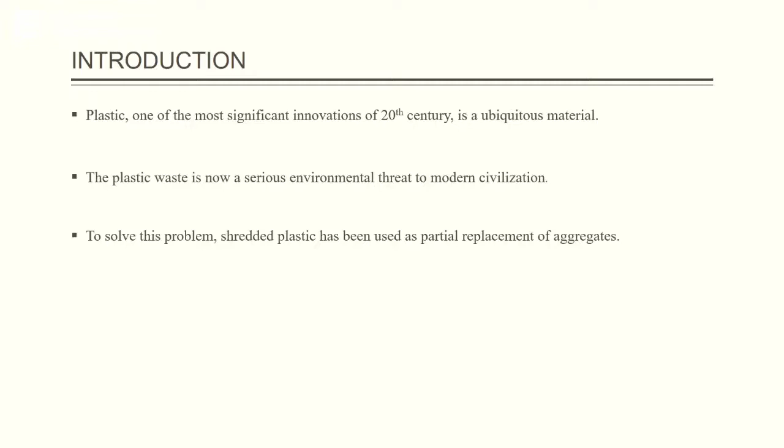To solve this problem, shredded plastic has been used as a partial replacement of aggregates. Some recent studies show it can be used in the construction industry due to properties like inert behavior and resistance to degradation. Also, use of waste plastic can help in reducing plastic waste.

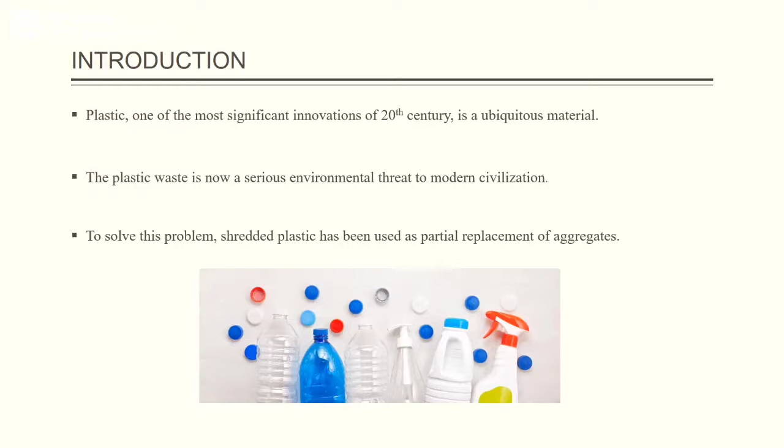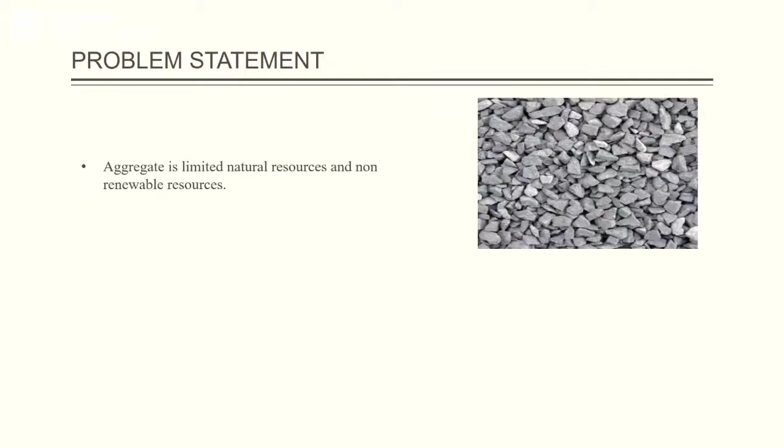Problem statement. Aggregate is a limited, non-renewable natural resource. The availability of conventional fine aggregates, that is river sand, has become scarce, and sand mining affects riverbed characteristics, increasing the cost of concrete.

Plastic waste needs a long time to decompose, so large quantities of plastic cause land, water and air pollution. It is believed that the breakdown of plastic takes more than 1,000 years. Improper plastic waste management leads to several environmental and health hazards.

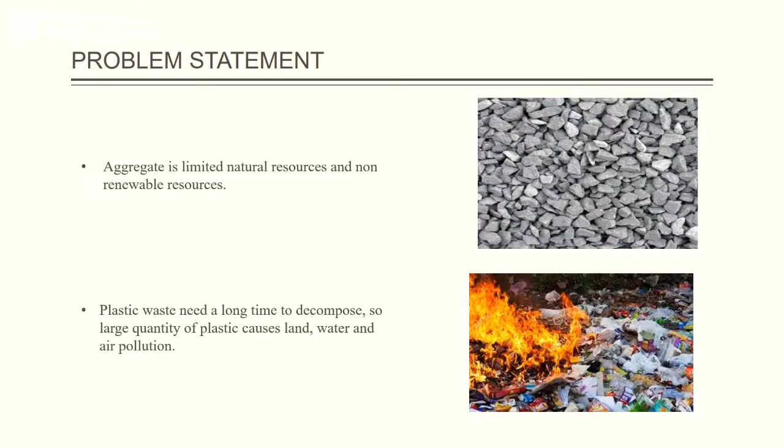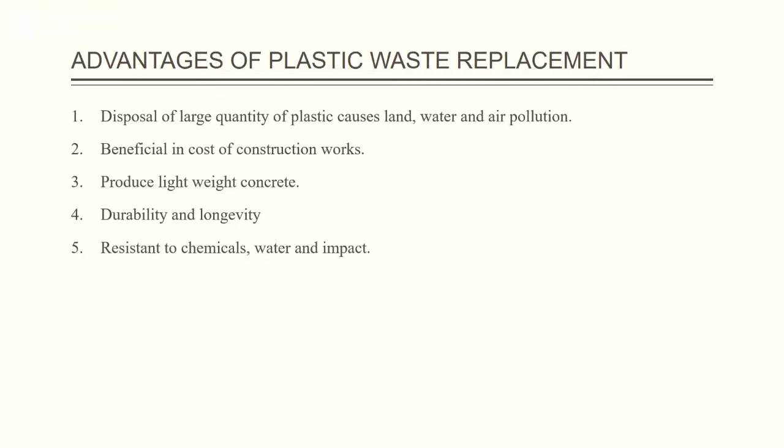Some advantages of plastic waste replacement: it reduces the land, water and air pollution caused by disposal of large quantities of plastic. It is more beneficial in cost of construction works. It produces lightweight concrete with good durability and longevity. It has good resistance to chemicals, water and impact, and excellent thermal and insulation properties.

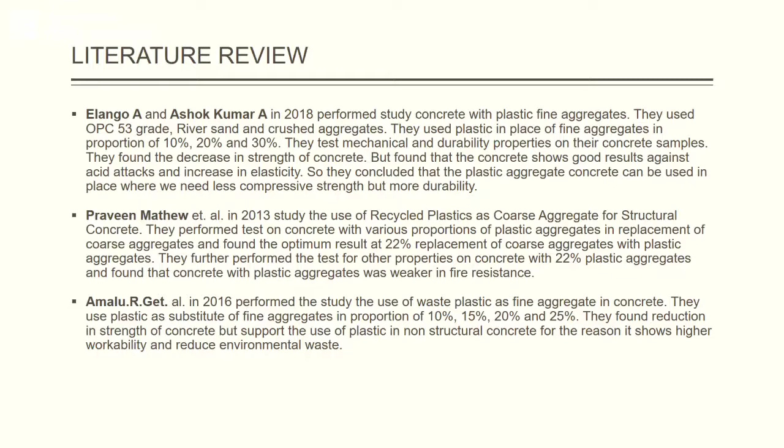Material properties: Cement. Grade 43 ordinary Portland cement was used for casting cubes and cylinders for all concrete mixes. These are the physical properties of the cement.

Aggregates: as per laboratory tests, the various physical properties of fine and coarse aggregates are given in the table. Waste plastic: the waste plastics used for this study are thermoplastic, low-density polyethylene plastics obtained from domestic, commercial and industrial waste sites.

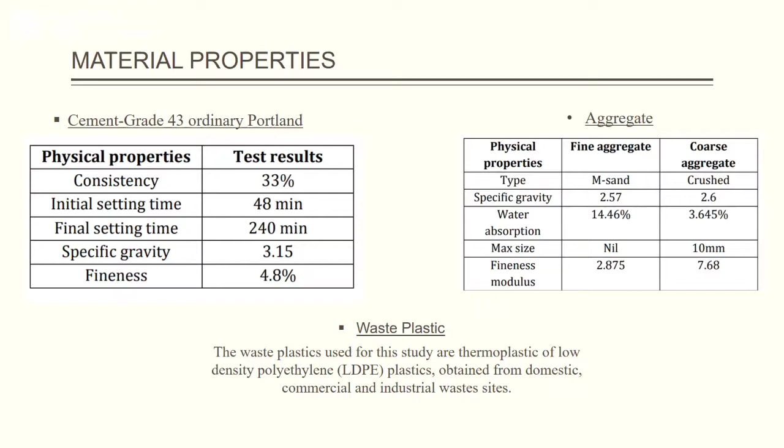Mix design: specimens were cast for different volume percentages of plastic, partially replacing natural aggregates with recycled plastic aggregates (RPAs), at 0%, 5%, 10%, 15% and 20%. Cube specimens of size 150x150x150 mm were cast for different proportions with RPAs and compared with the properties of concrete prepared without RPA.

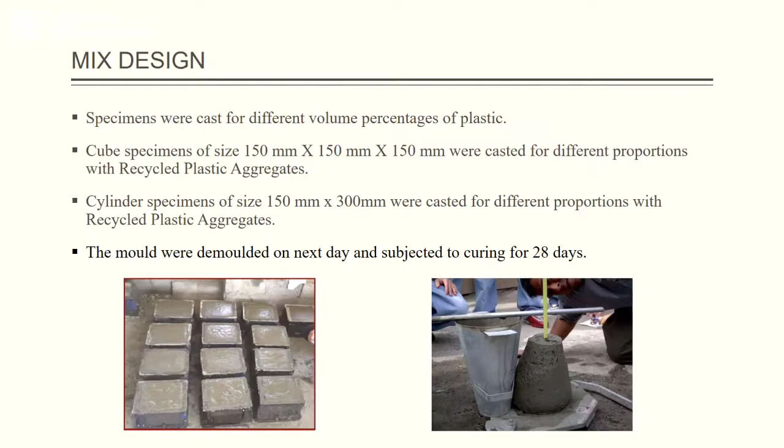Similarly, cylinder specimens of size 150x300 mm were cast for different proportions with RPAs and compared with concrete prepared without RPA. The molds were demolded the next day and subjected to curing for 28 days. The table shows the mix proportions for 1 cubic meter of concrete with various plastic percentages.

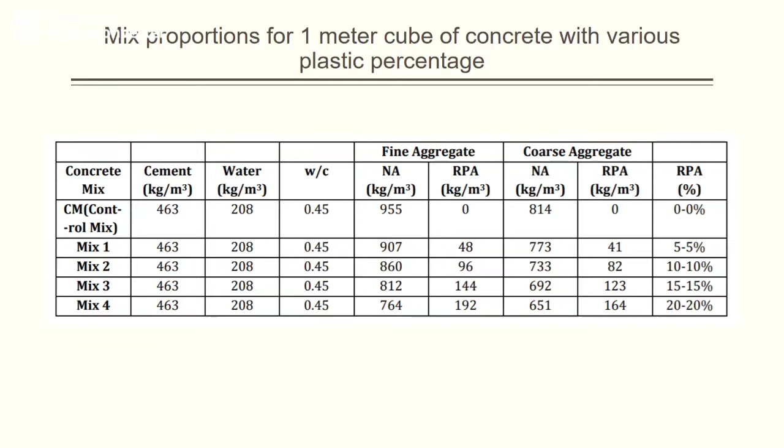Some of the experimental tests and results: slump test. This test measures the consistency of fresh concrete before it sets and is performed to check the workability of freshly made concrete.

When this test was conducted, the slump decreased sharply with increase in waste plastic ratio. The reduced slump values of waste plastic concrete mix are due to slighter fluidity and non-uniformity in shape of the plastic particles.

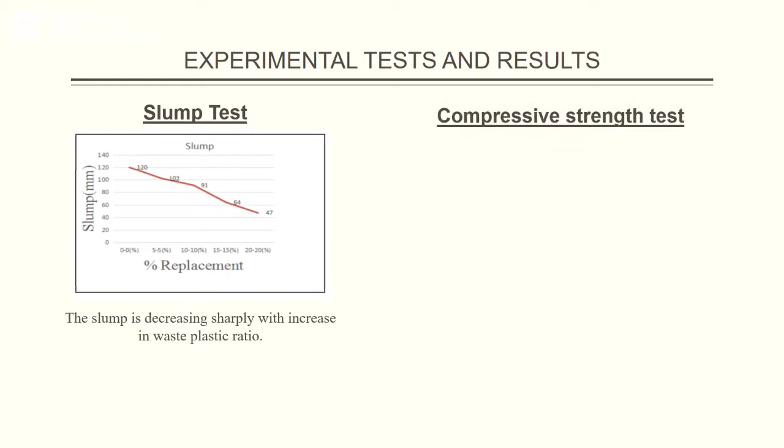Compressive strength test: this is used to determine the compressive force or crush resistance of a material and its ability to recover after a specified compressive force is applied and held over a period of time.

It was observed that there was a decrease in compressive strength by 27.7%, 47.7%, 71.9% and 81% with increasing plastic content for the various percentage replacements respectively.

Split tensile strength test is used to determine the tensile strength of concrete using a cylinder which splits across a vertical diameter. Cylindrical specimens of size 150x300 mm were cast for various curing ages and percentage replacements of fine and coarse aggregates. The tensile strength of the resultant mix is obtained by taking the average of three specimens. The trend is shown in the chart given.

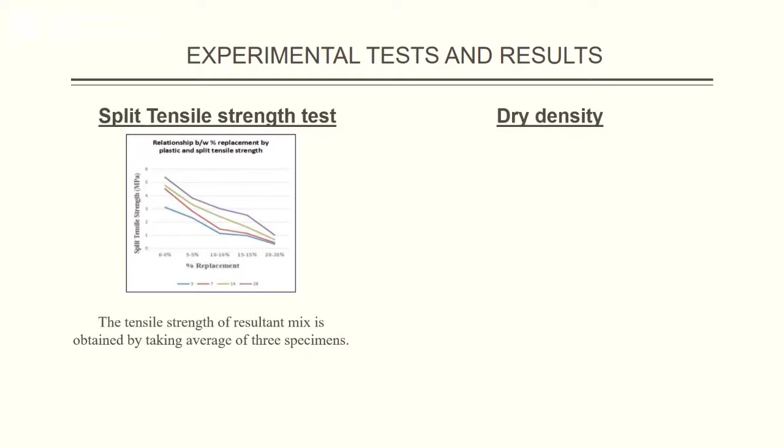Dry density: before performing the compressive strength test, dry density is analyzed first for various curing periods of each specimen replaced by a certain amount of waste plastic. It is found that concrete specimens replaced by waste plastic contained reduced unit weight.

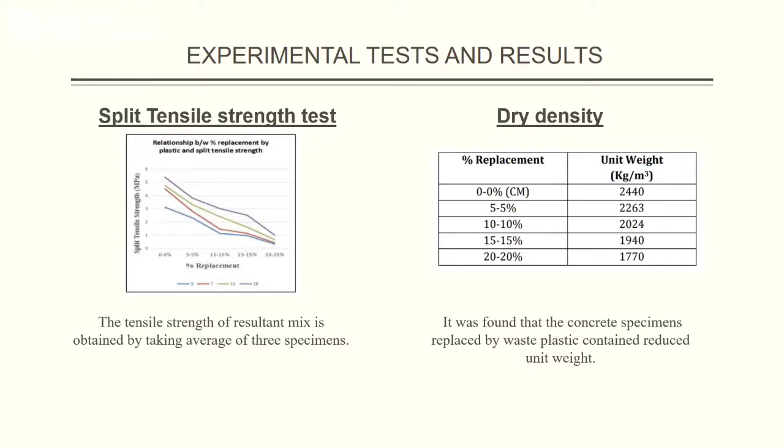Conclusion. The present study observes that both the fresh and hardened state properties tend to decrease as the percentage replacement of plastic in the concrete mix increases. The slump decreases sharply with increase in waste plastic ratio.

These types of mixes can be utilized in situations which require low degree workability. The compressive and split tensile strength of the concrete mix also decreases with increase in waste plastic ratio for all curing ages. With a replacement of 5 to 5%, the achieved strength was almost M30, which would be used

to make pathways, roadways and external walls and slabs. With a replacement of 10 to 10%, the achieved strength was almost M20, which was used as bedding of footings, domestic floors with reduced cost.

With a replacement of 15 to 15%, the achieved strength was likely M10, which could be used as patio slabs, pathways and other nonstructural works.

With lesser density, the 10, 15 and 20% replaced specimens fall under the lightweight concrete category, hence decreasing the dead weight of the structure. The various civil engineering applications where it can be used are namely precast bricks, partition walls, panel walls, canal linings and so forth.

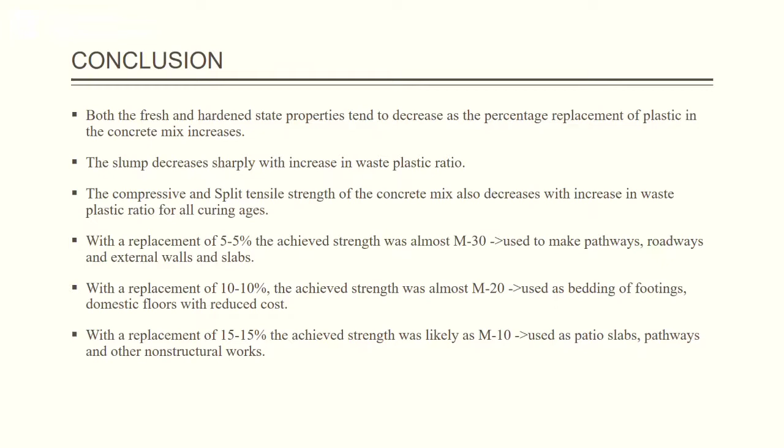Our next study topic is recycled polypropylene formwork technology for construction purposes. These are the contents involved in this presentation.

Introduction. As we know, one of the obstacles with concrete construction in case of horizontal slab is high weight, which limits the span. So recycled polypropylene formwork technology is a void slab technology in order to overcome this obstacle.

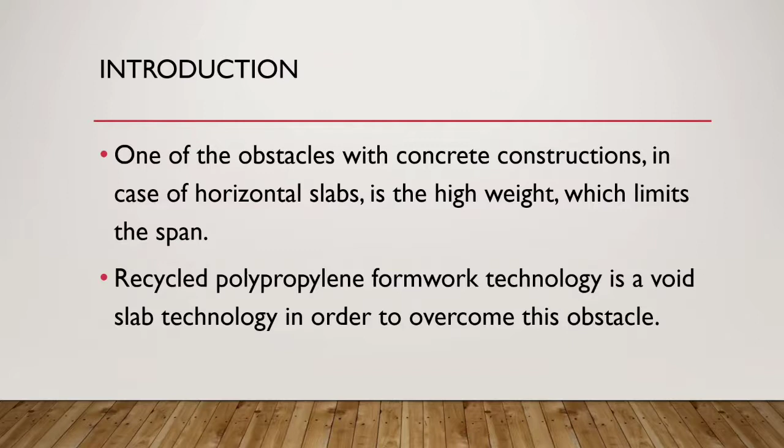So what is recycled polypropylene formwork technology? It's actually a void formwork placed in between the top and bottom reinforcement of slab. It is used to create slabs with large span or that are able to support large loads without beams.

It is designed to create lightened slabs and raft. This technology of hollow slabs with post-tensioned steel reduces the weight of slab and thickness.

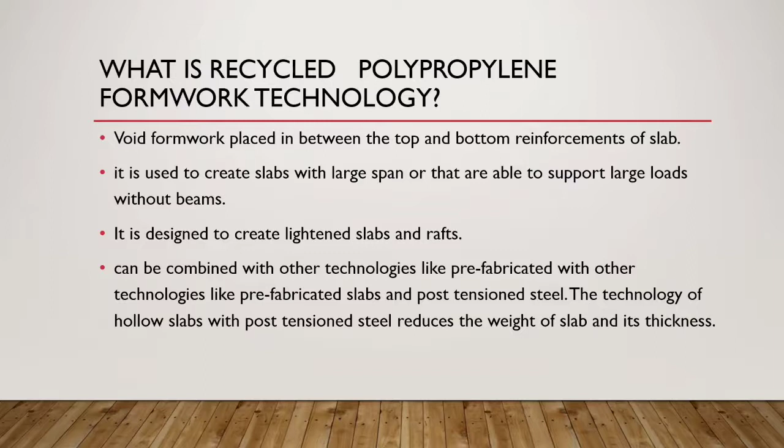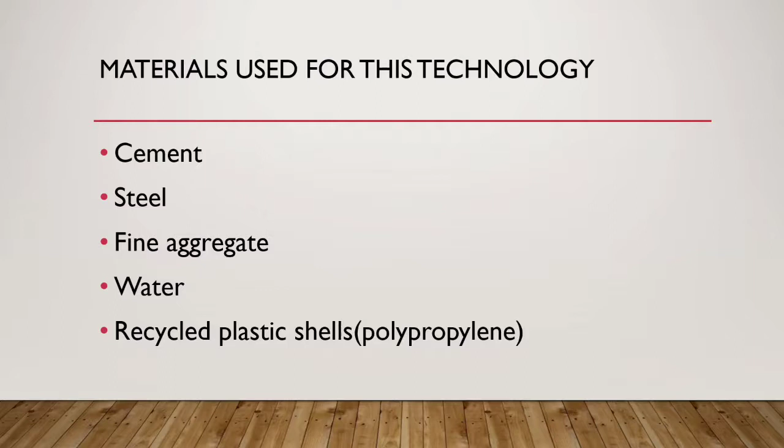These are the materials mainly used for this technology: cement, steel, fine aggregate, water and recycled plastic shells. For the production of formwork units, we are using recycled polypropylene.

So the question is, why only polypropylene? Why can't we go for other polymers? It's because polypropylene is chemically inert in nature and it has very high melting point. It is very resistant to cracks and stress as it is a flexible material.

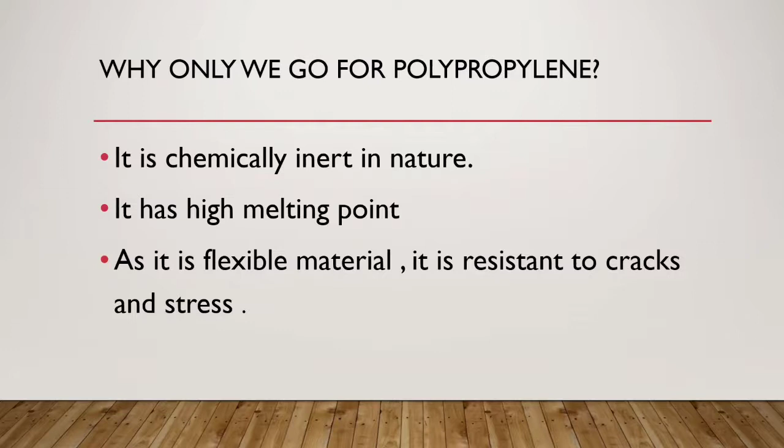Next is about accessories. The first one is spacer joint, also called a connection bridge. It gives perfect bearing capacity to formwork. It is used to connect two units with a graduated scale.

The second one is closing plate. It actually covers the bottom portion of the formwork unit.

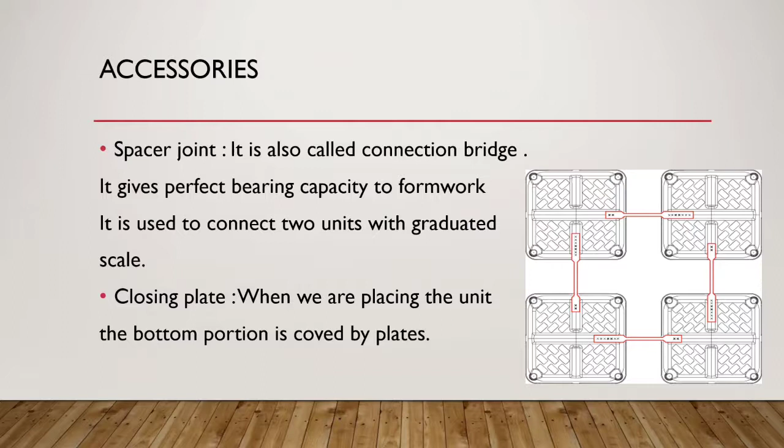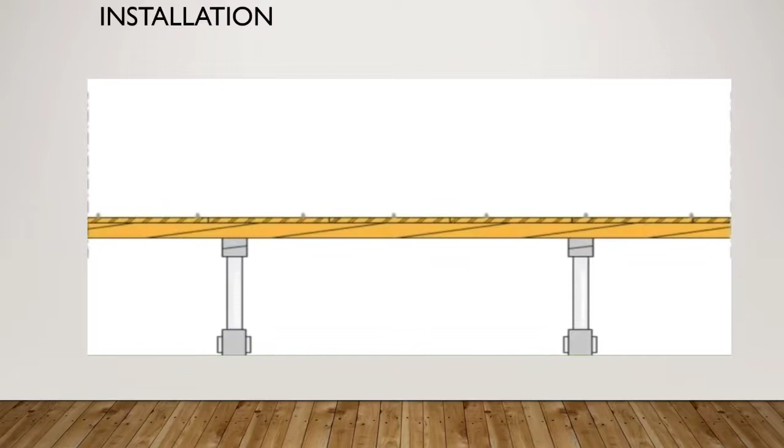So the next question is how we install these polypropylene formwork units within a slab. As we know, the first stage is construction of formwork. The second stage is placing the lower reinforcement structure above that formwork.

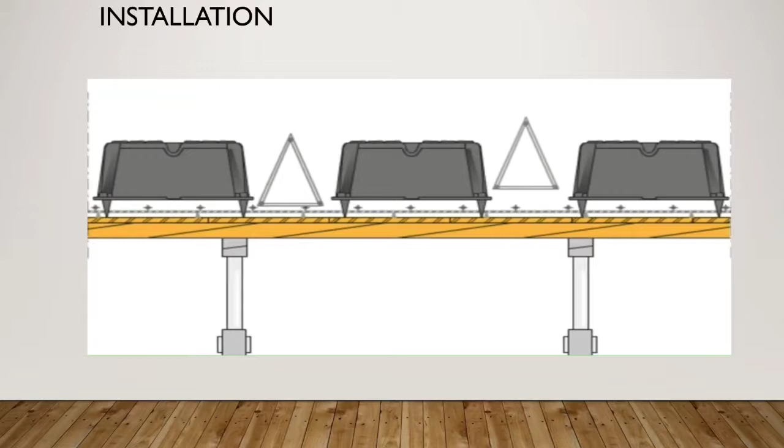Above that lower reinforcement structure, we are placing the polypropylene formwork units. In between the formwork units, we are placing a triangular reinforcement system. This triangular reinforcement system acts as beams.

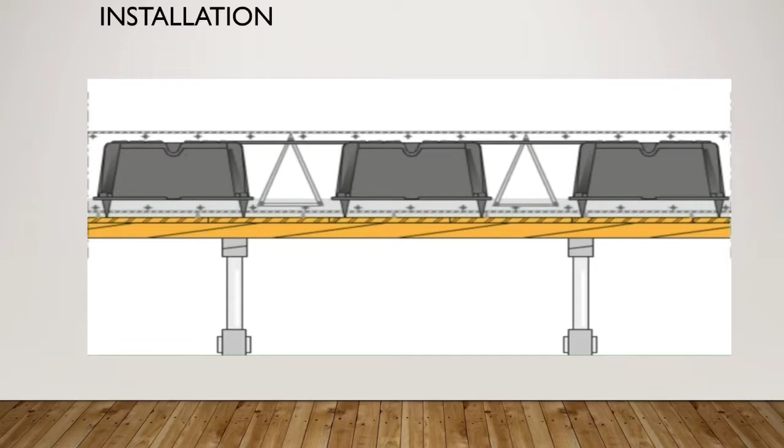Above that, we are providing upper reinforcement system and pouring of concrete is being done. After attaining enough strength, these formworks are removed from the slab.

Next we are going to discuss load carrying capacity. Tests have shown that for a bubble deck slab with the same load carrying capacity, only 50% of the concrete required for a solid slab can be used.

On the other hand, we can say that by using the same amount of concrete, this kind of hollow slab will give twice the amount of carrying capacity compared to a solid slab.

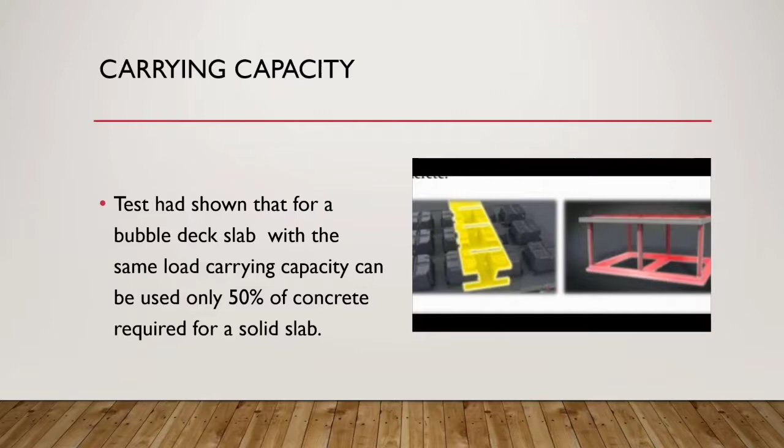Next is about the advantages of this technology. It has led to reduce the dead weight up to 50%, which allows creating a smaller foundation size. Reducing material consumption made it possible to make construction time faster.

1 kilogram of recycled plastic replaces 100 kilogram of concrete, so the overall cost reduces. The triangular reinforcement is provided for the purpose of working as the beam, as mentioned earlier.

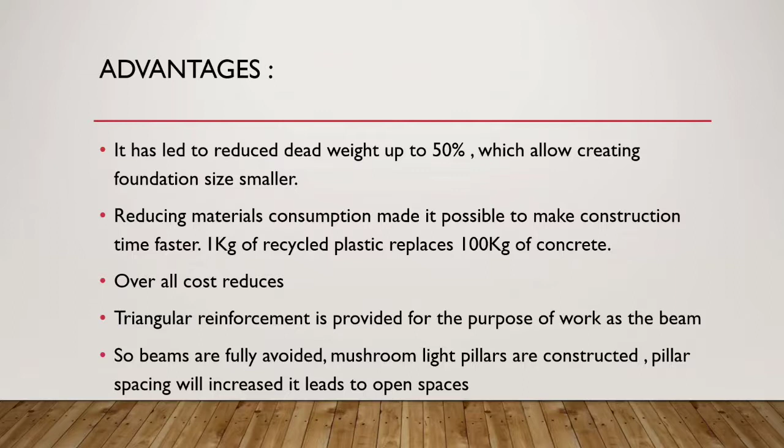The next thing is the structure is able to bidirectionally transmit the load. Usually the load transmits to slabs, from slab to beams, from beam to pillars, pillars to foundation. In this case, loads are directly transmitted to pillars and from there to the foundation.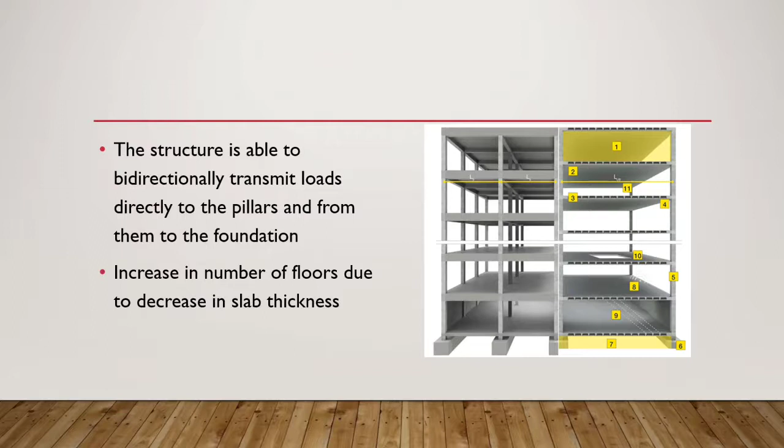It has high fire resistance, so the chances of spreading the fire to the higher stories are very less, and it has high sound insulation as we are using polypropylene formwork, and it is very resistant to earthquake also.

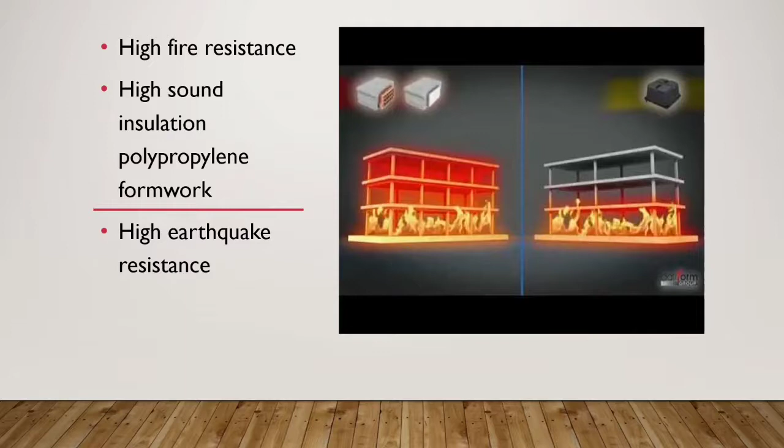The next slide is about the application of recycled polypropylene technology. It can be used in public buildings, hospitals, industries, etc., and using raft foundation and two-way slabs also.

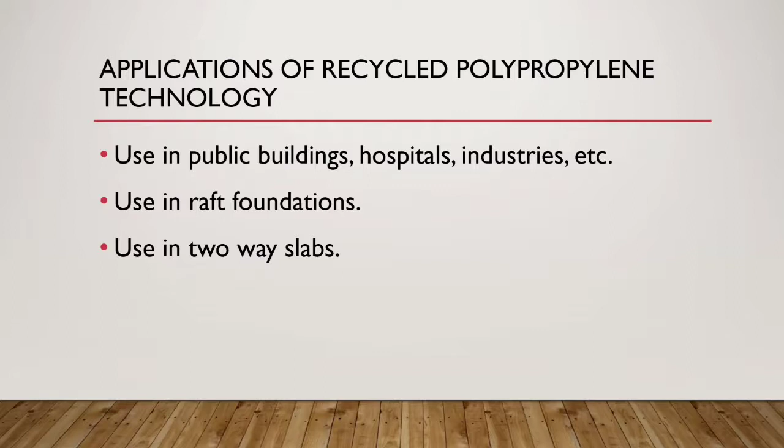As a conclusion, we can say that it is eco-friendly, economic and sustainable technology. By reducing the consumption of concrete and steel, the structure will become more economic. And as we know, by reducing the consumption of concrete, we can reduce the production of cement, and it will lead to reduce the global carbon dioxide emissions. Less use of iron in slabs, pillars, and foundation up to a total of 15%. The structure will be anti-seismic and it's a very useful technology.

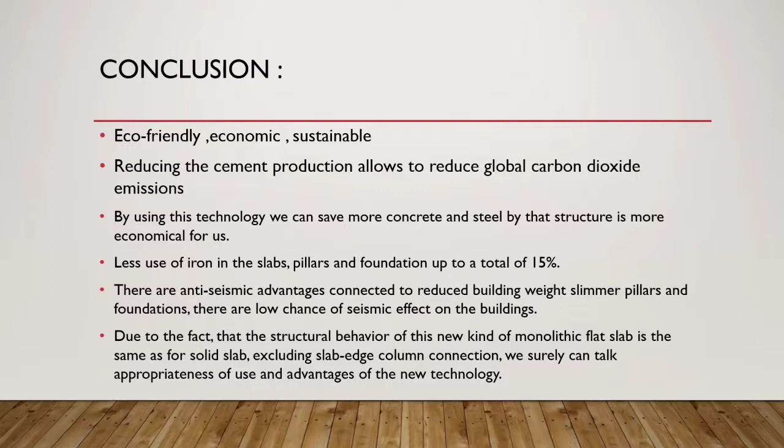Finally, these are the resources that I am getting information from, and thank you.

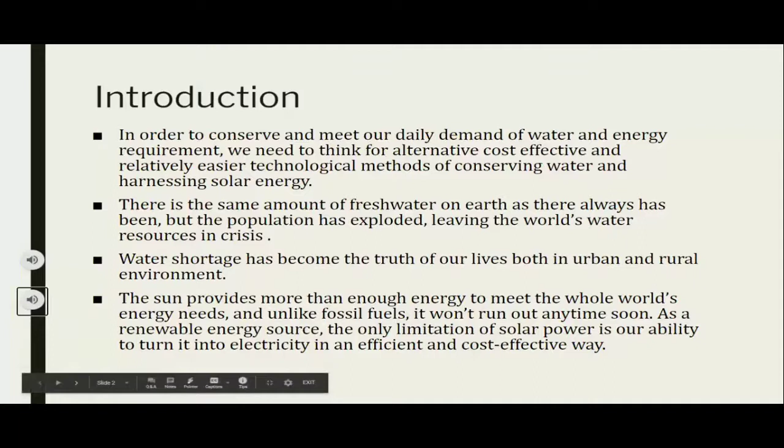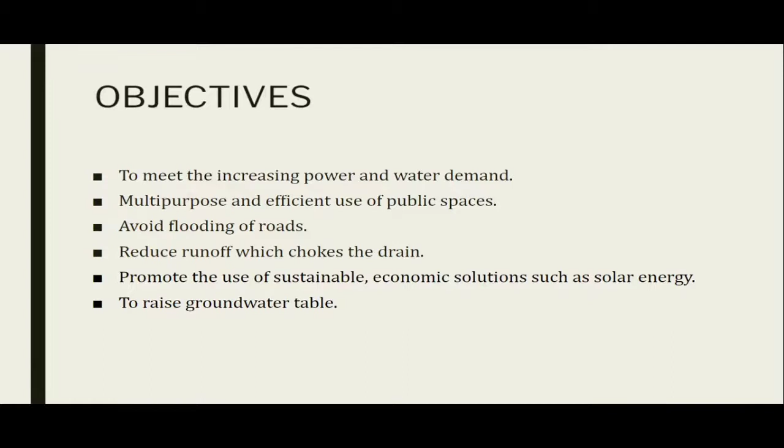Now, coming to the objectives of our project: to meet the increasing power and water demand, multi-purpose and efficient use of public spaces, and promote the use of sustainable economic solutions such as solar energy to raise the groundwater table.

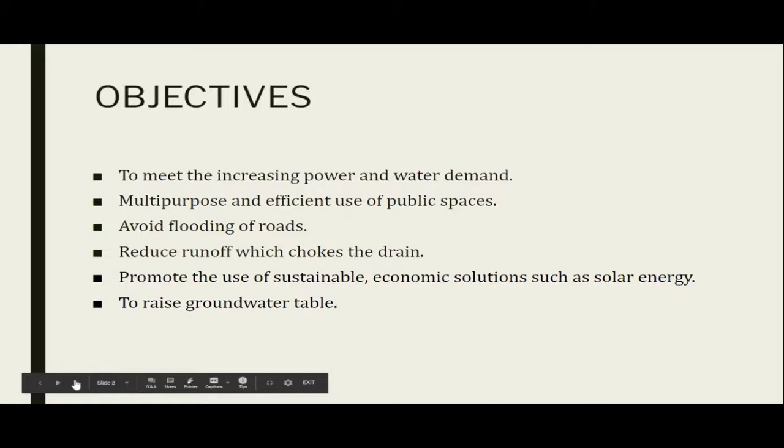We all know the situation of Kerala during monsoon. Drains are overflowing, roads are getting flooded, people lose their belongings and their lives. We need to bring an end to this. That's one of our major objectives.

At 12 feet high and 300 square feet coverage area, it is also a very large shading device under which almost 20 people can sit or two cars can be parked.

It collects rainwater, filters the water using a physical filter, then it reaches the storage tank through pipes. A part of the water is used to operate a UV water filter for drinking purposes. Another part of this water is used to run a low flush toilet placed adjacent to the parking.

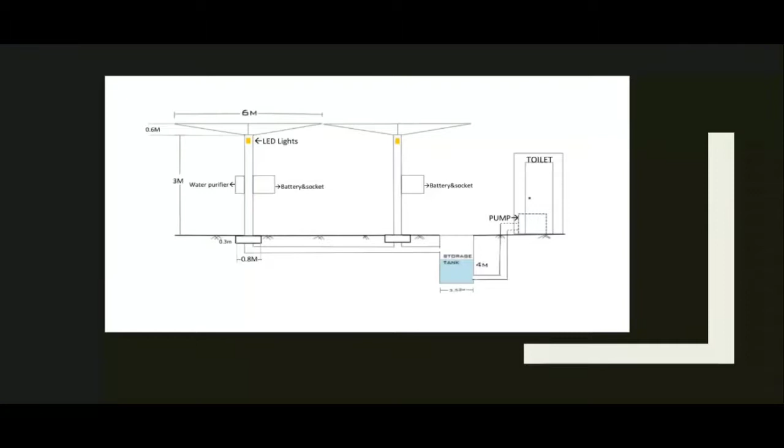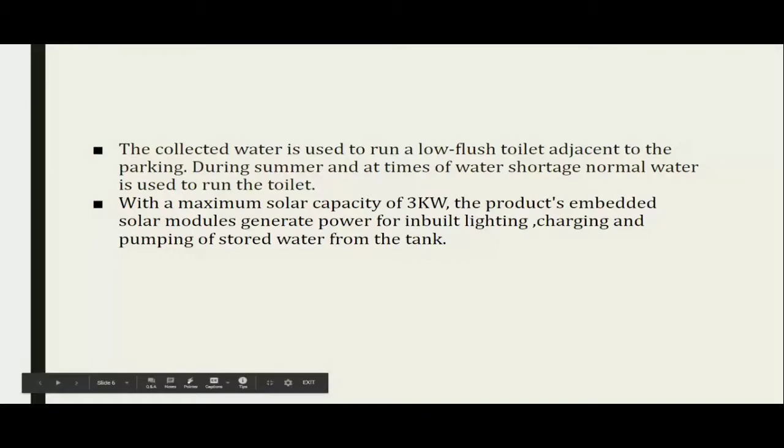The first one is a flexible inverted canopy. It is segmented, that is, it is divided into 8 triangles. The area of each canopy is 6 meter into 6 meter. The material of the canopy can be anything that we find locally. It should be thin, impervious to water, and flexible.

Then the next component is a steel unibody which is supported on the ground and it holds our canopy. The height of this steel unibody is 12 feet and it has a diameter of 0.32 meter. It is through the inside of this steel body that water flows and moves into the underground tank.

The next component is solar cell to provide energy. We are using 6 panels, that is we are placing 6 of these panels on each of the segments, so 2 segments will be left void. The type of panel we are using is polycrystalline and the watt of each panel is 250 watt peak.

So overall from one unit we get an output of 1.5 kilowatt peak. From 2 units we get an output of 3 kilowatt peak. This energy is stored in an energy storing device having 200 ampere hour and 12 volt specification.

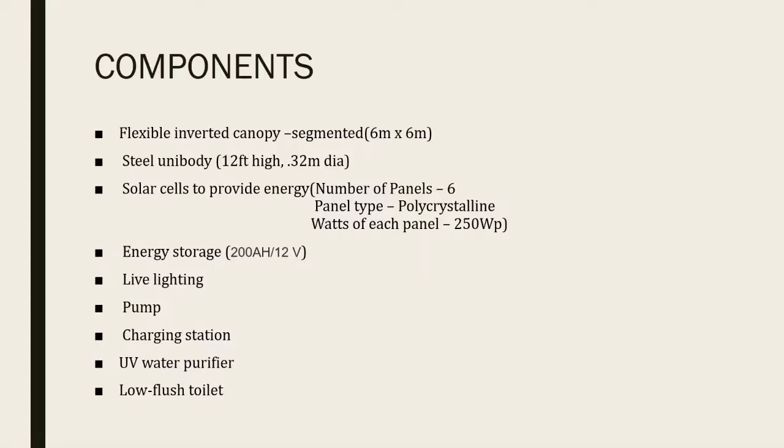Let us discuss how we have calculated the annual rainfall harvesting potential. In order to do this calculation, we have assumed that we are designing the structure for a parking space in Trivandrum. So we have used the annual average rainfall of Trivandrum, that is 1.754 meter. Then we have taken the catchment area as the area of one canopy, that is 36 meters square, and we have taken runoff coefficient as 0.8.

Runoff coefficients vary from 0.6 to 0.9. So based on the imperviousness, we can take it as 0.8. So using the equation V = KIA, we find that the annual rainwater harvesting potential of 1 unit is 50.5 meter cube. So for 2 units, we get a total of about 100 meter cube of output.

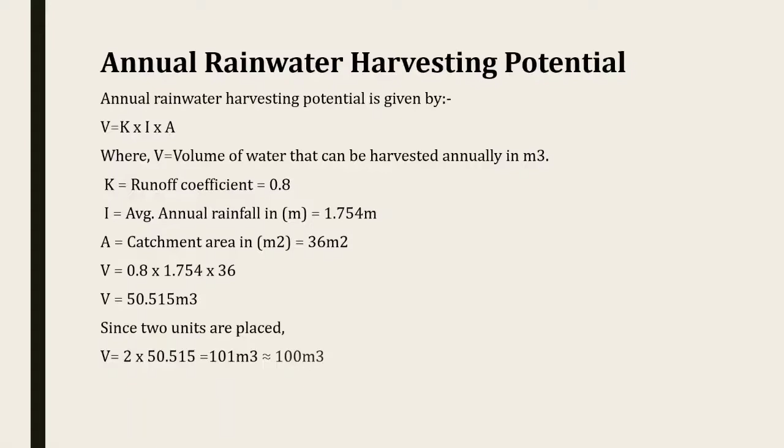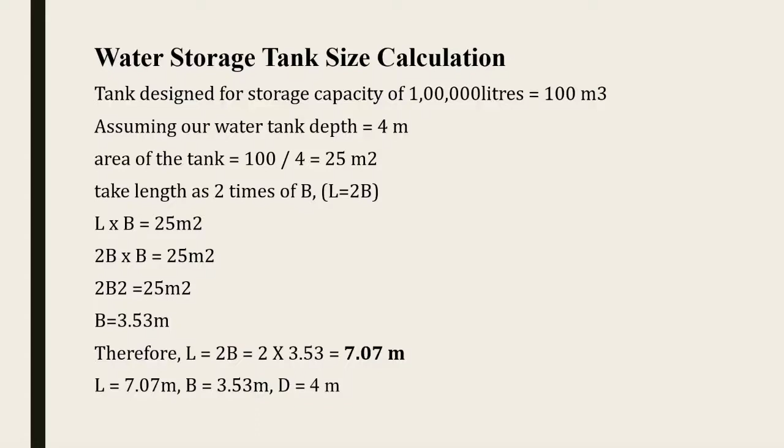So now let's see how we have calculated the size of the water tank. To calculate it, we have assumed one parameter. We have assumed the depth as 4 meter. We know we have to design a tank of capacity 100 meter cube. So we have taken length as 2 times breadth, and doing the computations, we have obtained length as about 7 meter, breadth as 3.53 meter, and depth as 4 meter.

So let us discuss the important question that is glowing in the face of this project. Why is it better than traditional water harvesting and solar energy harnessing systems? Compared to traditional water harvesting and solar harvesting systems, this method is so much more economical. So in the long run, using this would give you better benefits than going with the traditional ones.

Long-term warranty and low maintenance costs are other factors. And in addition to helping you cut the electricity bill, it also helps you cut your water bills. That is, we get a multi-purpose use out of this structure. So now, especially in urban areas, we prefer dynamic materials. We don't want to see concrete buildings anymore. So this structure is aesthetically pleasing, and it uses a variety of local materials that we find around us. So yeah, that's a plus point.

Then it fulfills a social responsibility to reduce carbon emission. Yes, that is the need of the hour. As earthlings, it is our responsibility to protect our mother earth. So there are little things that we can do, and this is one of them. So this has a much lower carbon footprint than most traditional alternatives that you find. So with that, let us move on to the next.

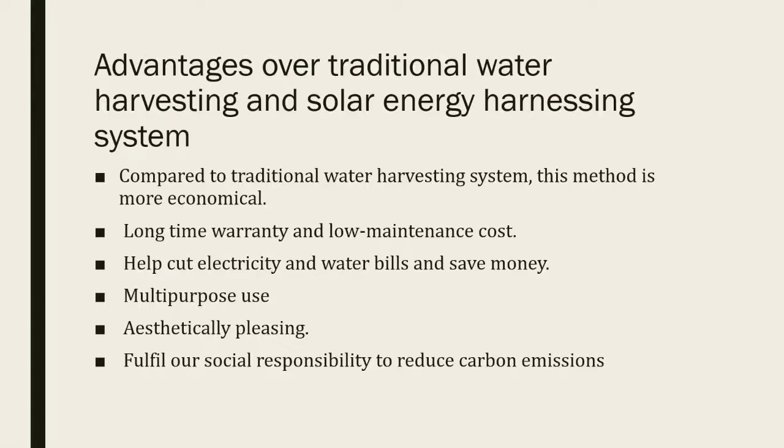Let us look at the further applications of rainwater harvesting solar harnessing systems. First point, it can be used anywhere you need an open space with a shade, where there are no hindering walls. That is, it can be used as green workstations, reception areas, cafeterias, and bus stops. Another good point is that it can be used for remote rural areas where it is costly to lay down transmission lines and water pipelines. There we can use this as a standalone water harvesting and power producing device. So it is economical considering the constraints that we have to provide these in rural areas.

It can also be used in open parking lots of airports, railway stations, malls, etc. We see our vehicles heating up under the sunlight. So this is a very good way of converting that heat into electricity that we can use, and at the same time saving a few bucks on water bills too.

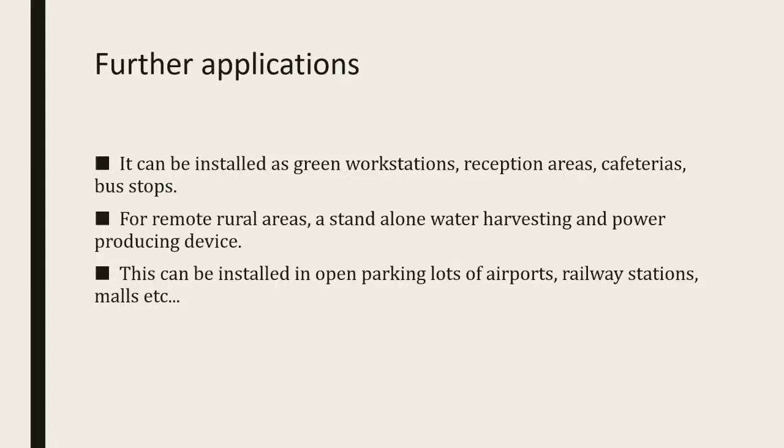Further, you can use it to recharge the groundwater below. The scenario that we see around us is that most of the floors, most of the outdoor spaces are concreted. That is, water just runs off. There are no holes for it to seep into the ground. So using this, we can collect the rainwater, and instead of providing a tank at the bottom, we can easily open the water and allow it to flow into the ground below. So this is a very good way of allowing water to seep into the ground where the ground is concreted. That's it.